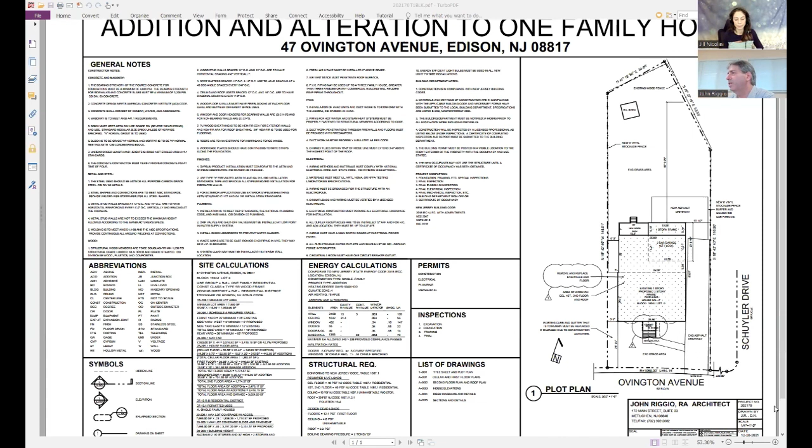So let me just go over here and go to the projects, and I'll share them right now on the screen. So the first one we're going to go over is over here. This project, I'll just go over first the plan on the PDF, let me share it here. So I think you could see the plan here. So this plan, what it has here is it just shows the project location. Let me just go to the next screen. What I'm going to do is open each one of these here, so I don't have to open and close it. Let me put on each plan, and then from this I'll go and show the photographs.

Okay, let me go back to sharing this. Okay, so now the plan is there, let me just switch to the next. Can you see the floor plans? Yep, okay I see them. So now this is the floor plan, and from this original house, what I did here is remove the stair that was going to the cellar. It was originally a 1-story house. Now this house is completely renovated, everything is removed down to the foundation. We've increased the height of the cellar level and added the stair that's going side to side. And if you look at this here, it says first floor plan - you enter into the house, you have your living room on the right side, you have your family room on the left side.

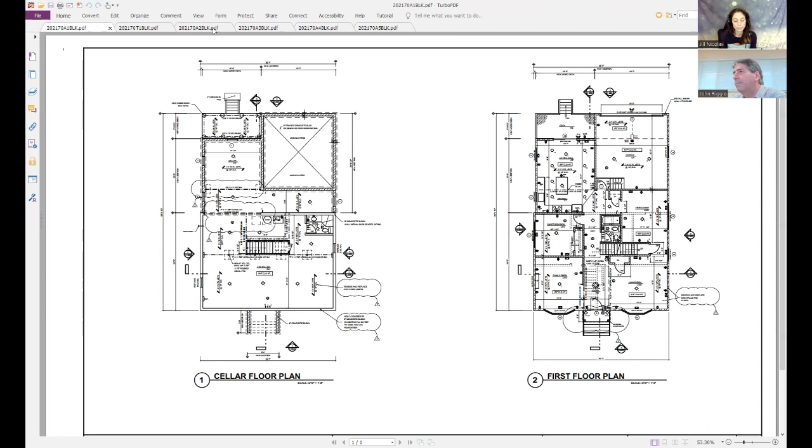This is showing really the number of bedrooms in this house. We have 1, 2, 3, 4, 5 bedrooms plus the one on the first floor, so it's a total of 6 bedrooms. The house fits into 3,000 square feet.

So the entrance has a double height space, and the stair here is going side to side. I'm getting a full bedroom now on both sides of the front of the house.

You have one bathroom connected to the bedroom here. Then the 2 rooms on the left side of the house are sharing one bathroom, and also the bedroom in the rear. So these total 3 bedrooms.

Now the master bedroom is on the right corner. There's a very large walk-in closet and a large master bath. Then in the center of the rear, it has a washroom, with a washer dryer and slop sink there.

This is standard on all the new projects today, so you don't have to go all the way down to the cellar floor to use the laundry room. You have it right there on the second floor.

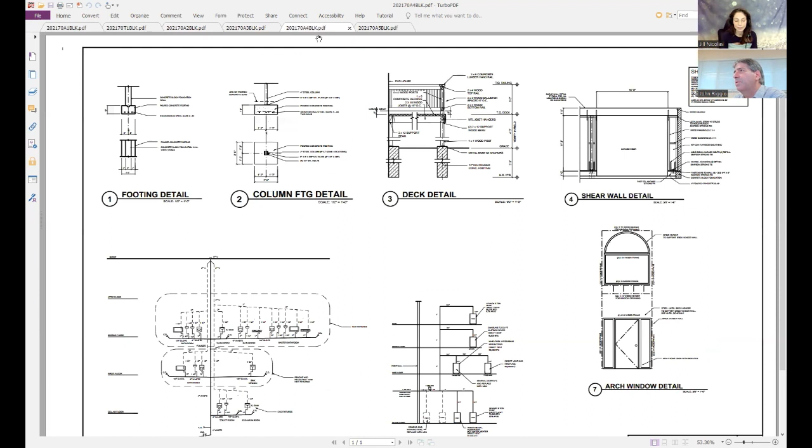So let's just go through the plan here. This was just some details of the plan and the sections of the plan. Then this here just shows how the plan is being used, where you would come from the street, go all the way to the rear yard, and come back around and have that garage there.

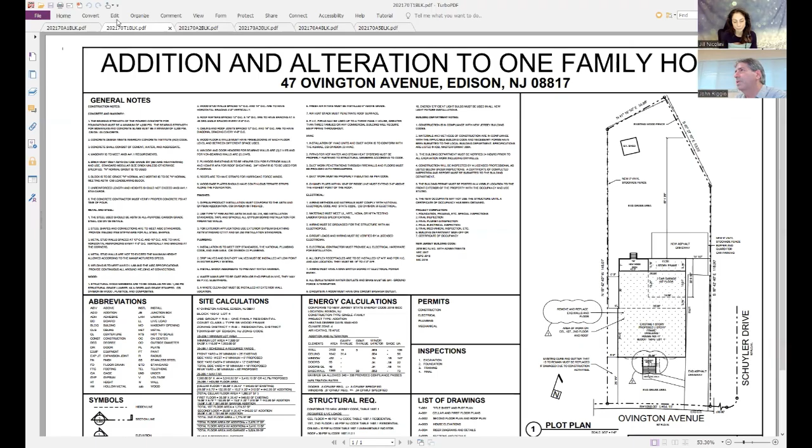This is keeping the required setbacks on the property, the coverage requirements, and the front yard setback is also within the code requirements. So let me just change now to some photographs.

How long does that take from start to finish? That job started in October of 2021. So it's been a full 2 years. Wow, you're just finishing it.

I have some final pictures of this house now. I was just there this week. And this is the finished product of the house.

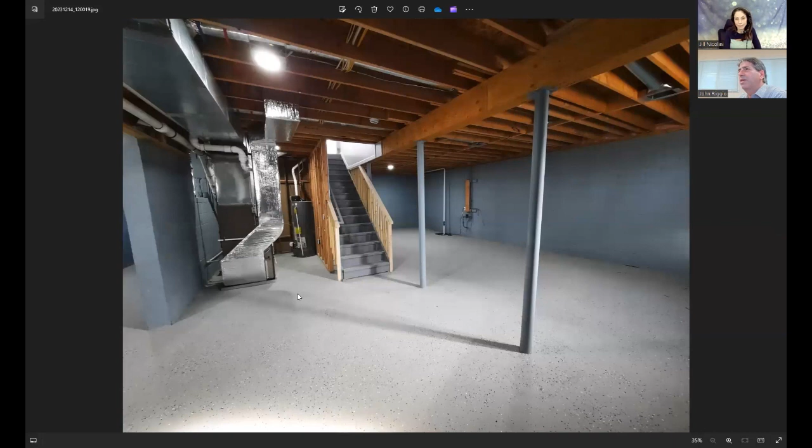Now this is the cellar, completely renovated. They added three courses onto the top of the foundation, and the whole floor and structure are completely brand new. You can see these very large glulam beams with columns, and the stair going upstairs there.

This is just showing the open area of the cellar. And then this here is the picture going up to the second floor.

So this is efficiency, really making efficient use of the floor area and the space here. It's a 3,000 square foot house, really getting a lot more out of the house and giving it a very nice contemporary design. So this is the bedroom.

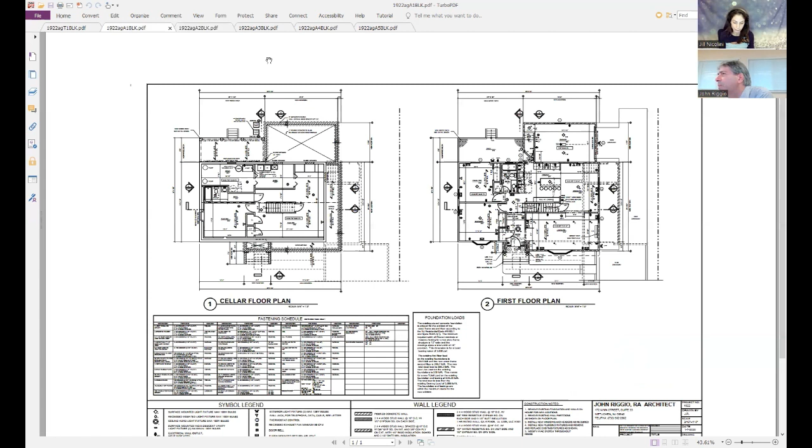And then let's go to the next plan. Same idea. So this whole second floor has the two-story entrance, the stair side to side, with also the stair going up to the attic for storage, and adding a window onto the front of the house. This has four bedrooms on the second floor, and on the first floor we had two rooms. One was a family room, and the other one is a guest bedroom. So it still has a lot of rooms here.

And the same idea with this one. Let's see, three bedrooms are sharing one bath, and then one master bedroom that has two walk-in closets and the bathroom, and then the detailed roof here.

So let me just skip over to the elevation. The elevations have a somewhat similar look, the same type of contemporary look, but the ideas of this one also were the same, having the sideways stair and the garage in the rear of the house. That's getting the most out of the square footage of this size house, a 3,000 square foot house, getting two full rooms in the front of the house, a much larger kitchen area.

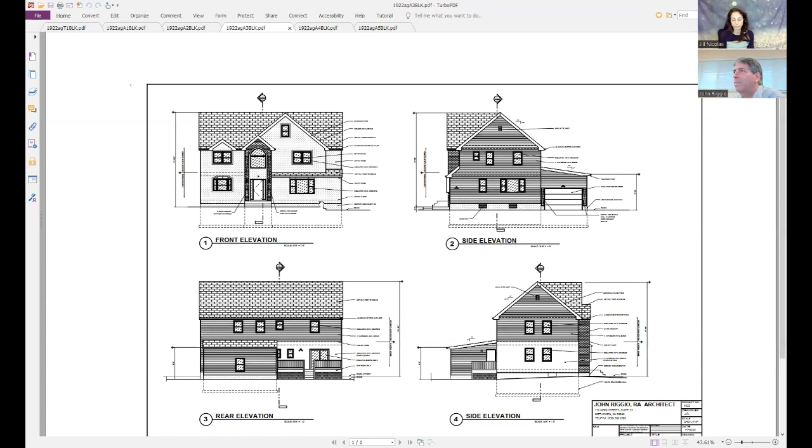And this is just some details. Those are just some original details of the house. And this is getting a lot more out of the house.

So let me just show you some finished photographs of this particular house.